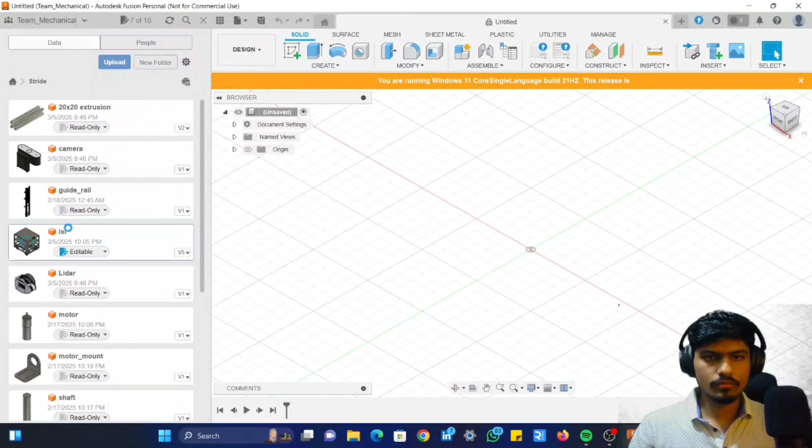Today I learned a workaround for how to create a URDF of this robot and export it to ROS. One way to do it is to go to Utilities, then Add-ins, Scripts, and use the Fusion URDF Exporter ROS2.

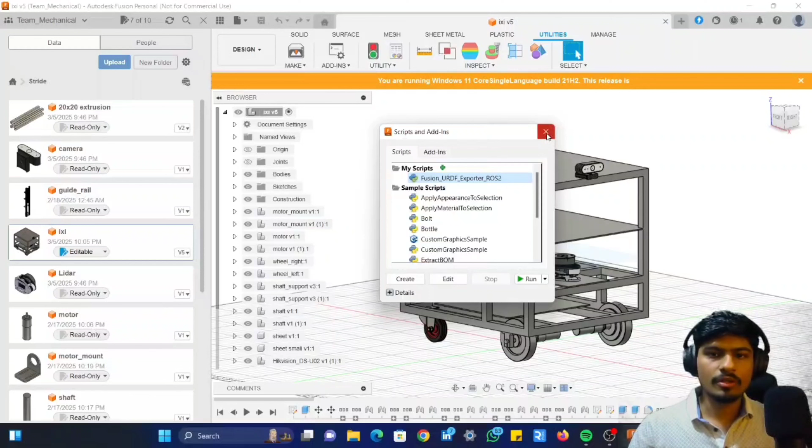This will automatically ask you a few questions based on which version of Gazebo you're using, and it will create a URDF for you and export the STL files. But most of the time this doesn't work because it requires very strict configurations in the component settings, like having a single component or single body inside each component, which is quite difficult to follow.

So I've come up with a workaround for doing the same thing. Right now all the components are separate - wheels are separate, the shaft is separate, the caster wheels are separate. The first thing I'll do is break the link of whatever components you've imported from GrabCAD.

You just go to the component and break link so that you can modify the components in the file itself, or else you won't be able to do that. So I've broken the link.

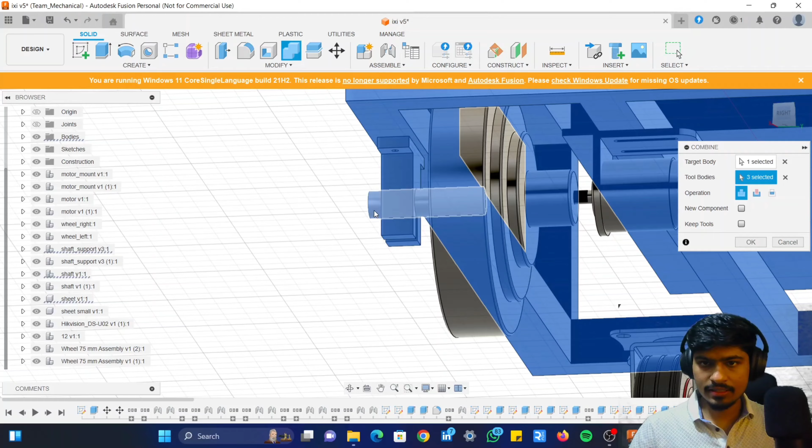Now I'll select this as the mainframe and combine the other components with it. I'll combine this sheet with it, this guide rail with it, this shaft, this motor mount, and similarly for this one.

I've combined these components which are rigid and don't require any movement. In ROS, whatever links or TFs we require separately, I have not combined them - like caster wheel TF, wheels TF revolute joint, LiDAR and camera. But the chassis can be a single frame, which we call base link.

So I'll do new components and keep tools. As you can see, this entire component has become one - I can hide it and bring it back. So this will be our chassis or base link, and these are the wheels which will be separate links of type revolute, and these are the caster wheels.

We'll keep the caster wheels as fixed only. This is the LiDAR link and this is the camera link.

So what I'll do is export all of these individually. Before that, keep in mind that whenever you press home, this is the x-axis of ROS and this is the z-axis. So your bot should keep facing the x-axis only.

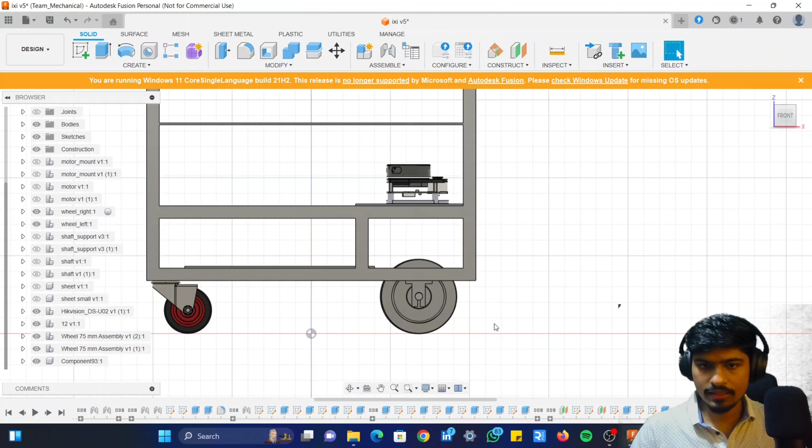The other thing is your bot should align with the x-axis or z-axis at 0. If it's not aligning, just move it up like this - select all the components and move it so that it aligns to this red line.

Then we can simply export all the components one by one. We'll hide the wheels, camera, LiDAR, etc., and export this as a single component. We'll export this - just go to File, click Export, give the name which you want to export.

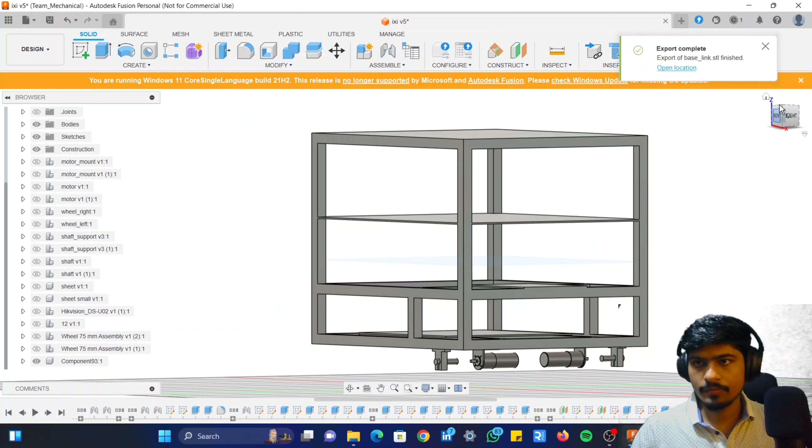I'll export it as base link, select the place where you want to store this, select STL, and click Export. So this will get exported. Export complete - the base link got exported.

Now I'll hide the base link and export this wheel. I guess this is the caster right wheel. I'll go to export, name it caster right, and click export. It will export.

Similarly, I'll repeat the process for the left caster. I'll do the same for the LiDAR, and once again for the camera, and repeat the same process for the wheels - this is the left wheel, and I'll repeat the same for the right wheel.

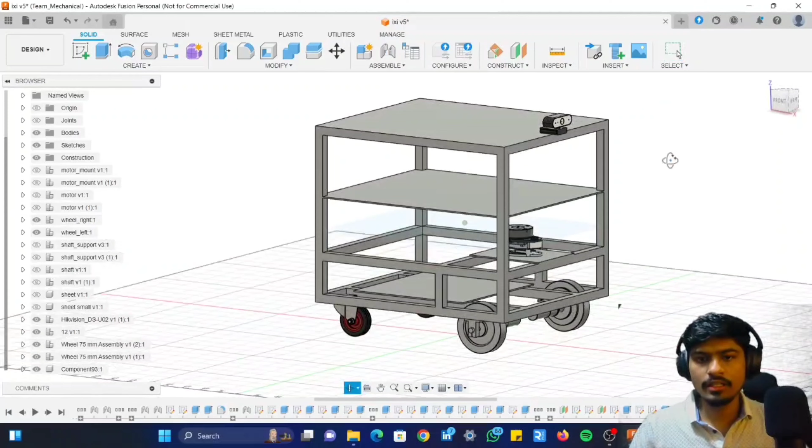The advantage of exporting it like this is that the position of each component is saved. If you import the camera in ROS, it will come at this position only, so you don't need to manually adjust the position - although you do need to manually adjust the position of the joints.

For that, the next step in the workaround is that you note the position of the joints manually. This is a bit complex, but it works. So I'll go to Point at Center of Circle, and I'll click on this circle.

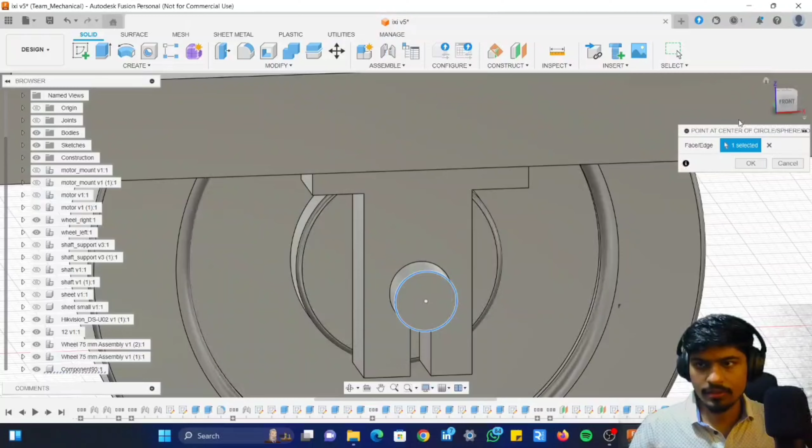You can see a point has appeared at this place here. These are the coordinates of this point - the x coordinate, y coordinate and z coordinate. So note down that the right joint coordinates are this.

You just have to move this joint a little backwards. Similarly, note down the coordinate of this one - Construct Point at Circle, click on this. Note down the coordinate - it will be the same, just the y coordinate will change and become negative.

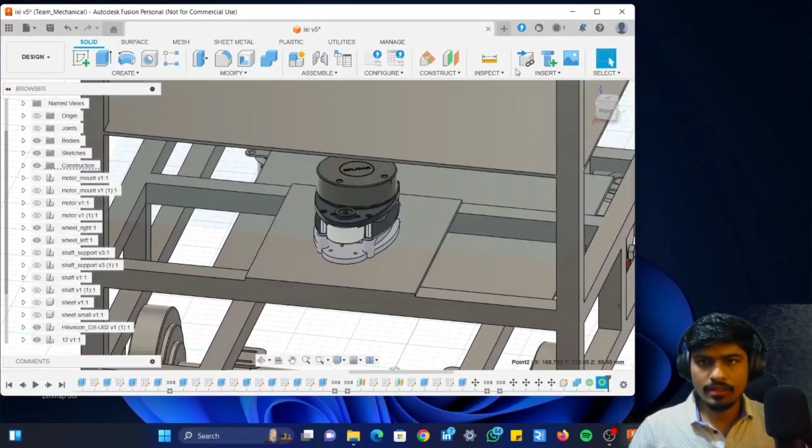Similarly, note down the coordinate for the LiDAR. Select this, okay, we'll get to know the coordinate of the LiDAR as well. Repeat the same for the camera and for the caster wheels, and select this. Now note down each individual coordinate and keep it.

Now we will import these files to ROS. Here I have attached all the STL files and I'm mailing them to myself, and in Linux I'll download all these STL files. So now we have switched to Linux.

Now we will go to Chrome, open our Gmail, and download all the STL files. Click on download all attachments - it will download all the files as a zip file. Once downloaded, navigate to where your files are and unzip all of them.

So here we have downloaded all the STL files of our robot successfully, and now we will import these into ROS. For that, I'll see you in the next episode.